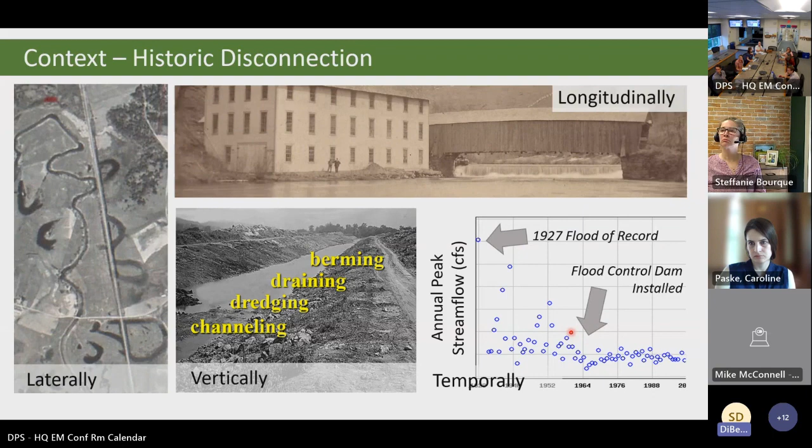So those disconnections really translate, on the left, to water quality, enhanced export as rivers get disconnected from their floodplains. Maybe what we're all more focused on today is that with stuff in the way in floodplains, we get a lot of damages. We saw a lot of this really play out in notorious ways during Irene, but this happens all over the state. You all know from ongoing flood damage, and this happens at different scales.

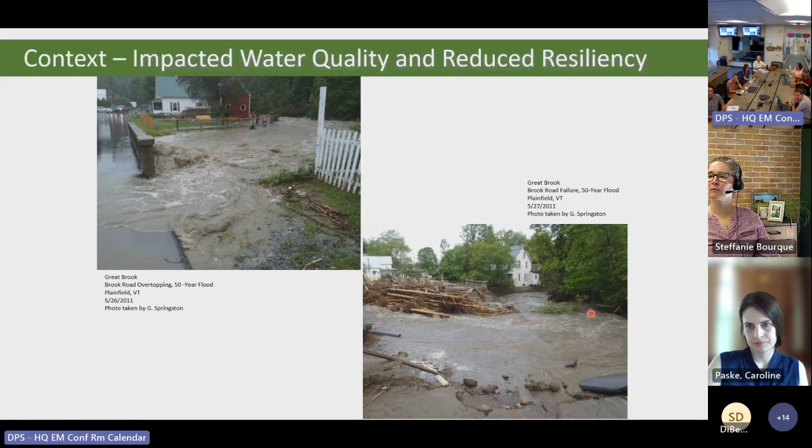We think a lot about the pictures we've seen, going back to Route 4 and Mendon Brook, major disruptions. But here's a small bridge and playing field where enough floodplain's been disconnected in a system that's in a narrow valley, causing disruptions to debris transport. So there's an ongoing project to put in a bridge that fits the stream channel but also tries to improve transport. A lot of this really stems from disconnection in the floodplains.

Another example or two: this is a project ongoing in the area of Williams Street in Brattleboro. There's going to be a big floodplain reconnection project there that will help with flood storage, again addressing developed floodplains and some historic filling in floodplains. On the right, you can see that we are forcing rivers to do things they don't often do, and this is really disrupting the longitudinal and temporal connectivity.

And this is Roaring Brook in Killington, where the brook comes out along Route 4 and is asked to make a hard river left turn into an alluvial fan. You can see that after Irene the fan was reformed, maybe in a lower area. This whole area is an alluvial fan, and it really comes back to the connectivity of these rivers, and they create hazards that play out over a range of storms.

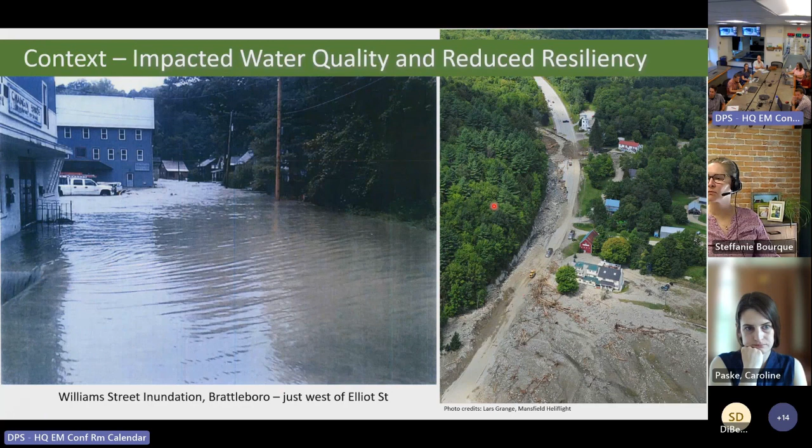So really FFI is going to try to use some of the research we're using to start understanding resiliency and what that risk reduction might look like. And that's kind of the goal of today.

Taking a step back, to understand FFI, you need to know a little bit about the TMDL. It's a very unique TMDL for Lake Champlain, and it includes a component, a sector that's linked to river instability, 20% of the pie. This is based on phosphorus loading, but nonetheless, the framework of this is really how we get to resiliency, and you'll see it as we talk today.

So phosphorus export happens from the landscape, and some monitoring and previous studies suggest that 20% of that comes from unstable river channels, and a lot of that stems from disconnection from floodplains. So it's a unique TMDL in that we will continue our policies of working towards the least erosive geomorphic condition, allowing channel evolution to play out.

And so the channel erosion practice, it says it's not a conventional site scale BMP. The idea is, and we'll talk a lot about this today, that if you harden streams in the river corridor, you're not getting a credit for those from a phosphorus perspective. And this might put a nuance in some of our work we do to keep people safe around rivers and to reduce flood hazards.

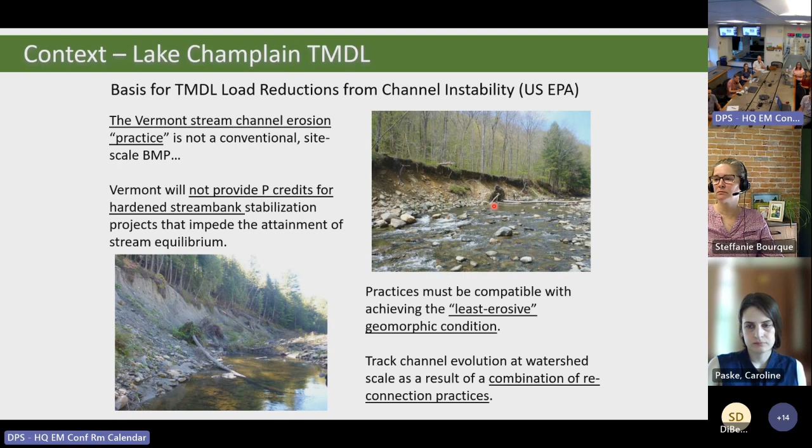If you think about what we do on the landscape in terms of floodplain reconnection projects, when we put a corridor protection, a river corridor protection easement on an area, we allow this process to play out, or we preserve a floodplain connection. When we go out and lower a floodplain, we're really pushing a channel towards stage 5 of that evolution process.

And then you'd get some crediting for that. What's more important for this group is that crediting is linked to floodplain connectivity. So Evan's going to dig deep into the departure analysis, because it's not only the basis for how we provide P credits, but it's the basis for how we offer credits or potential risk reduction in dollar amounts for resiliency.

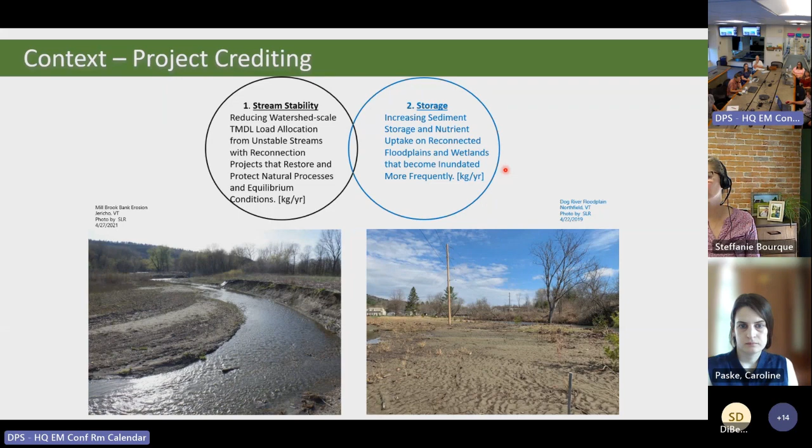From a water quality perspective, you get credit for two things: one is you do a project that improves stream stability through reconnection, and two is you create storage. You'll see a bit about this as we play around with the web application. If you want to really dig deep into this, there's a several hour training that's going to be a video, but we'll focus on resiliency here.

You can also credit post-2016, when the TMDL was implemented. That's maybe a little less relevant here, but it's important to understand the vision of that, because when we do our resiliency projects, we can actually impede on this natural vision, which would eliminate the potential for other credits going along. So when we do a water quality project, a resiliency project, or a habitat project, ideally these co-benefits go together—even around the transportation system, we can get crediting for that.

This is a graphic that I believe Stacy, Shannon, and Mike put together—it was a combined effort out of DEC.

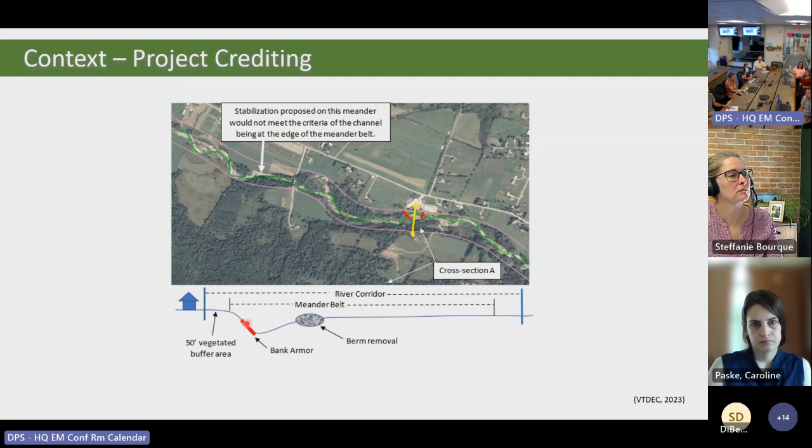Just an aside—I've been doing some project work recently around riprap and historic riprap, and we're seeing like a 10 to 20 year lifespan on armored banks before they have to be maintained, in pretty steep and high power settings, like on the New Haven River and along some roads. So there are nudges you can do to make that longer or shorter, but this riprap is a temporary thing, something we have to deal with and maintain over the long term. Just a side note.

Then there's been some discussion about the Connecticut Basin. The methods would have to be—not the floodplain connectivity methods—but on the nutrient side, methods would have to be changed because nitrogen becomes more of an issue in the Connecticut Basin. The TMDL for Long Island Sound, its receiving water, is a nitrogen TMDL. So there would probably be some change in methodologies.

And then we haven't really talked about the Hudson drainage area and down there. So right now our focus is the Champlain Basin.

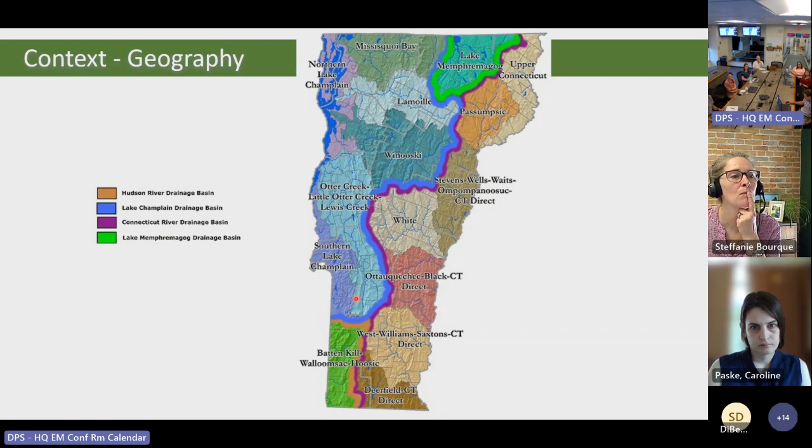State funded a project in Ripton, Vermont. Middlebury River was another big hazard mitigation project where flood chutes are reconnected. These are like safety relief valves for when flooding happens. The nice thing about these is they're out there—a lot of the work happens outside of a flowing river.

Berm removal—we did an assessment on cost effectiveness on the phosphorus side, and we found that berm removal is probably the most cost effective way to get phosphorus credits. We're not going to dig deep into that information, but if you think about a berm, it often has the most bang for your buck per dollar spent on floodplain reconnection because it's a smaller feature that runs right through a floodplain.

A piece of the context is Vermont's been, in my view, leading the way on floodplain reconnection. We had this great geomorphic data set. It moved to river corridor planning. Our state has always been looking at risk reduction. When I first learned about the rivers program, there was always a three-prong approach: habitat, public safety, and resiliency and water quality. That really led to a lot of these floodplain restoration projects.

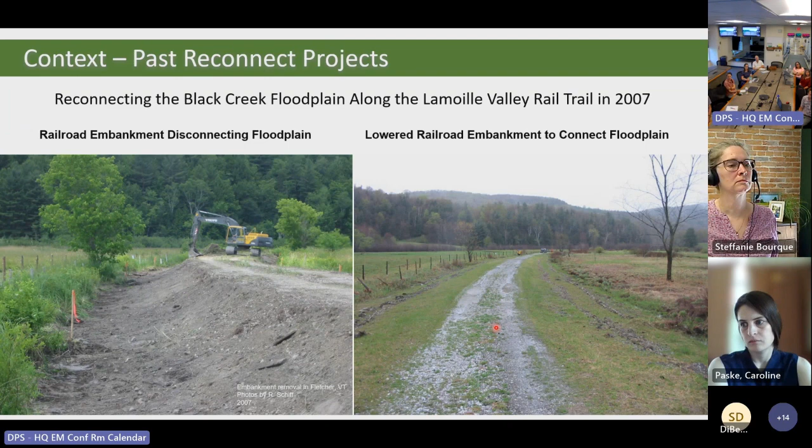So this is the Black Creek floodplain reconnection. I believe this spot was in the Fletcher, Bakersfield area, where you basically lowered a berm and reconnected a floodplain. And now the Lamoille Valley Rail Trail goes through the area.

All this information is housed on a web application. We're going to play around with it after the break. I do want to credit Stone Environmental, which actually built the physical web application. Evan, myself, Mike, Kristen Underwood, and others really worked on the methodology development, and they did a nice job smashing this all together into a web application.

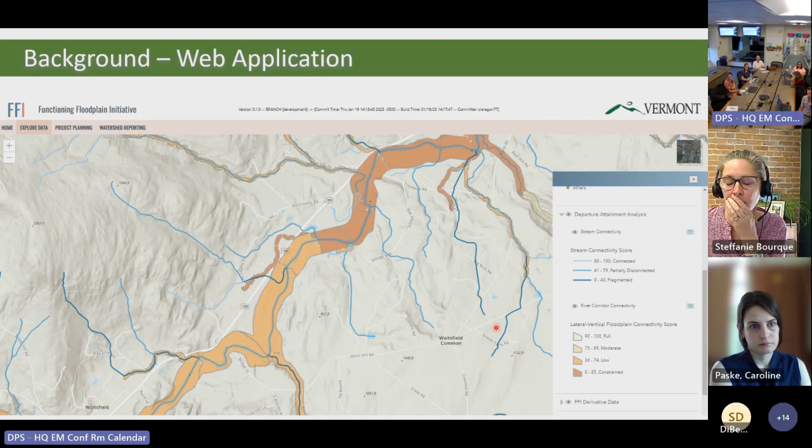And in that, you can start to look at connectivity. So Evan's going to give us a walk through that after the break.

One thing I wanted to say is that FFI, as we've started using the tool more and more and made refinements, is something you're going to revisit as a project gets developed. So you might use FFI to do some initial planning and project development, think about it during alternatives analysis, but you might keep coming back to it as you learn more about a project through the design and evaluation process.

The size of a project might shape some of the parameters, and reconnections as you develop a project just might expand. So whether you're looking for a phosphorus credit, a resiliency credit, or a habitat credit, you'll probably be coming back a few times to the tool. And once you get comfortable using it, it's really quick to just put in the information and get some predictions of what you're crediting and what your benefits might be in the project.

Everything we're going to talk about today, and probably even more, is in the user guide. We're working on a revision—we're about to wrap up this phase of the FFI. This is our last training at the end of the month, so the user guide's getting an overhaul. All the nitty-gritty details and background we're going to talk about today are in the appendices, so you can dig deep into them on all the phases of FFI.

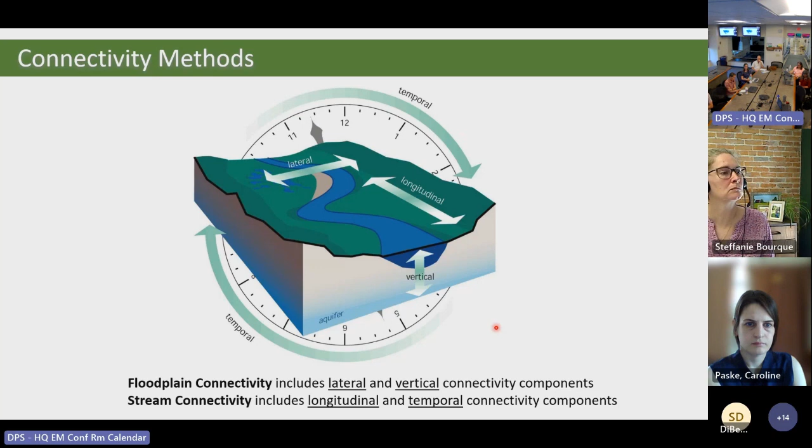When we talk about connectivity, you'll hear us talk about floodplain connectivity and stream connectivity. Floodplain connectivity encompasses lateral and vertical components, and stream connectivity longitudinal and temporal. Here's a simple graphic to illustrate our target condition for connectivity. An ideal connected river is fully connected laterally and vertically, has robust protections on the landscape, including easements or other protections I'll describe in a bit, and has a healthy woody vegetated buffer. Those are the three components.

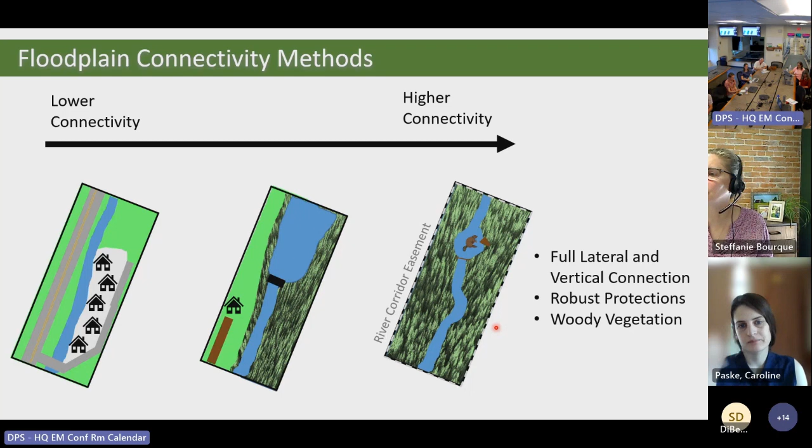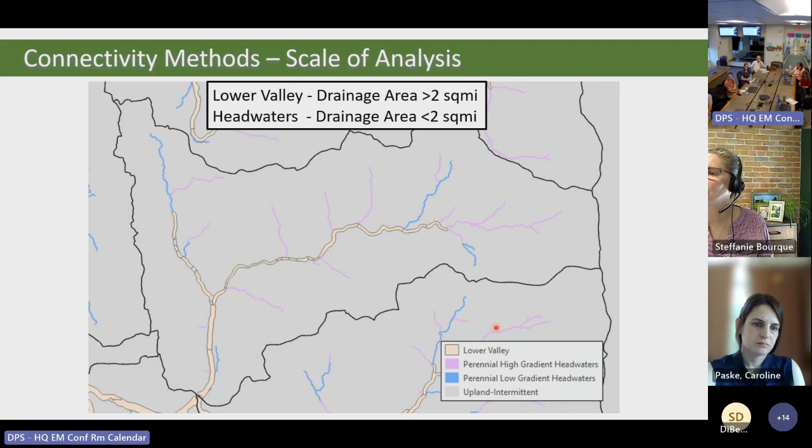We measure connectivity at different scales, and the number to keep in mind is 2. 2 square miles separates what we call the lower valley reaches from the headwaters, which may be familiar to some of you. The river corridors drawn at the statewide scale from DEC start at the 2 square mile drainage, go downstream, and the headwaters are upslope from that. The other number 2 to keep in mind is 2%, since we separate high gradient and low gradient streams based on that 2% threshold.

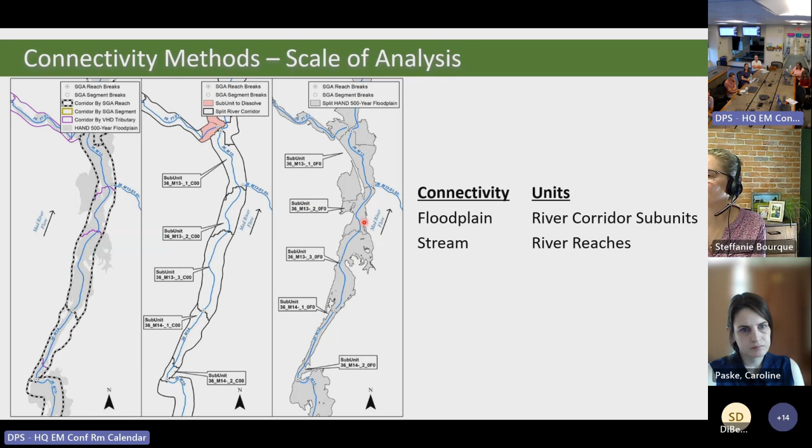Protections are an area-weighted factor of different overlays on the landscape that we get from mapping. The highest level of protection would be a river corridor easement that protects the corridor in perpetuity and allows the river to establish its full pattern and profile. Other protections, like floodplain protections and state lands, we consider a lower level. We do an overlay in GIS, consider all those different levels of protection, and translate this dimensionless rating into high, moderate, limited, or mostly absent.

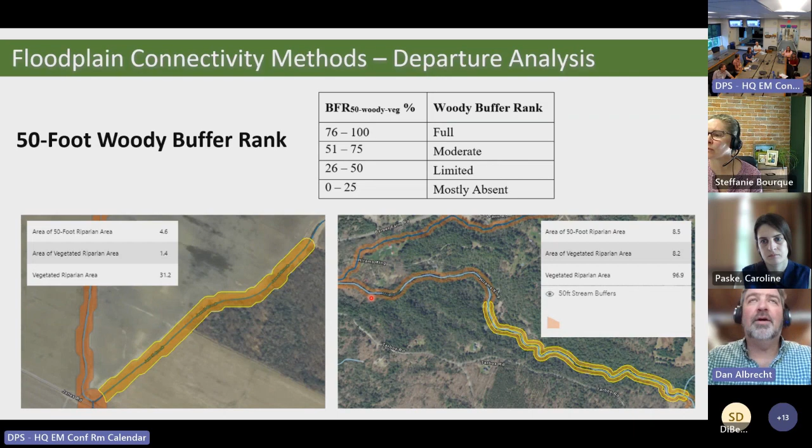I don't know if anyone else wants to add. Well, yep, that's what I was thinking it was. So you answered my question. And I think there's always the chance at some time we decide it's not, like in Brattleboro. I was surprised.

I'm glad you said something, Dan, because I was like, oh, we snuck through that FEMA floodway. God, it was in the moderate category. There was a lot of debate about some of these.

I think the thought was that if there was a potential for someone to control a river and do a disconnection project, it could be like a small berm or a little armor, and those happened all over these floodways. So unless we're sure, we're going to bump it down a little bit and create the potential for a reconnection project. I think that was our thinking.

Yeah, that's a really important point, I think. Flood hazard bylaws don't prevent armoring per se, or stream alteration permits from being issued to stop migration.

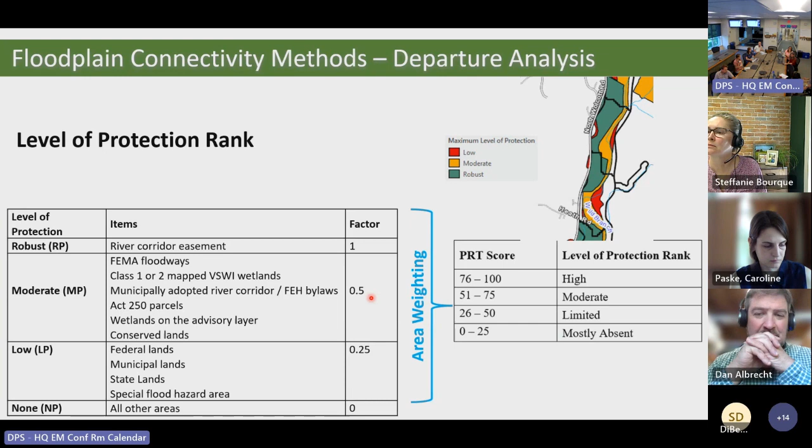I think wetlands and floodways were in a one, and a couple people brought this up and we agreed we should probably bump those down. Because a FEMA floodway is looking at something different, it's looking at conveyance of water, purely how quickly can we pass water somewhere else. It's almost the opposite.

Thanks, Dan. Okay, so then we bring, I'm just going to keep zooming along here because we got a fair amount to cover. We bring these three criteria together. You can see the weighting in the upper left: 50% for lateral meander connectivity, 35% for the protections, 15% for the buffer. That's 100%.

Now we bring in, so this is lateral connectivity, and now we bring in the vertical component. So what this map is showing, zooming out in the Mad River Valley, you see a lot of green, and that's because laterally the Mad River Valley is actually pretty free of constraints if you ignore agricultural constraints to start. But the river is very incised through the Mad River Valley.

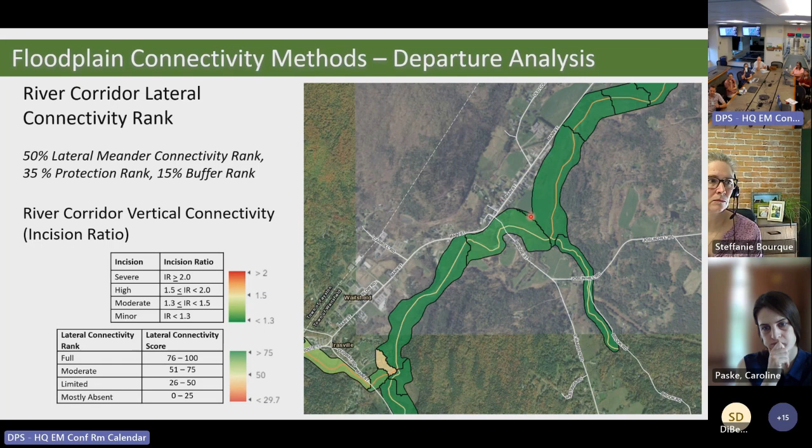So now we bring in a weighting of one-to-one, lateral connectivity and vertical connectivity, because really you need equal parts both to have a connected river. And when we consider the incision ratio, we see in the Mad River Valley in particular, and a lot of our lower valley reaches that are incised, we bring those together one-to-one and we have a pretty low connectivity rating, even if laterally we're free of constraints.

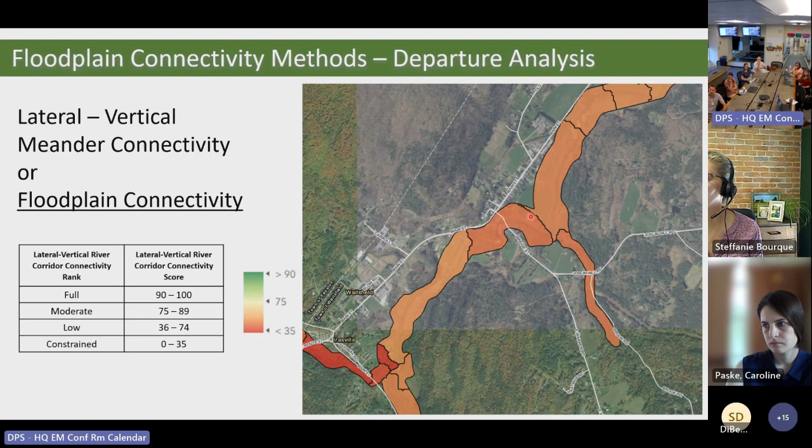So stream connectivity is made up of the longitudinal and temporal components, 60% and 40%. Here we're talking about longitudinal barriers to the movement of water, sediment, debris, and ice downstream, and aquatic organisms upstream. Temporal connectivity considers the timing and magnitude of flow, including low flows. A good example of human infrastructure that disrupts both would be a big flood control dam, which affects how water and sediment debris moves downstream and prevents AOP upstream.

So for both longitudinal and temporal, we start with a score of 100, pretty simple scoring, and then we deduct based on the magnitude of that disruption along the network. We do consider incision as well, because incised reaches will disrupt the sediment regime and the balance of sediment moving down valley.

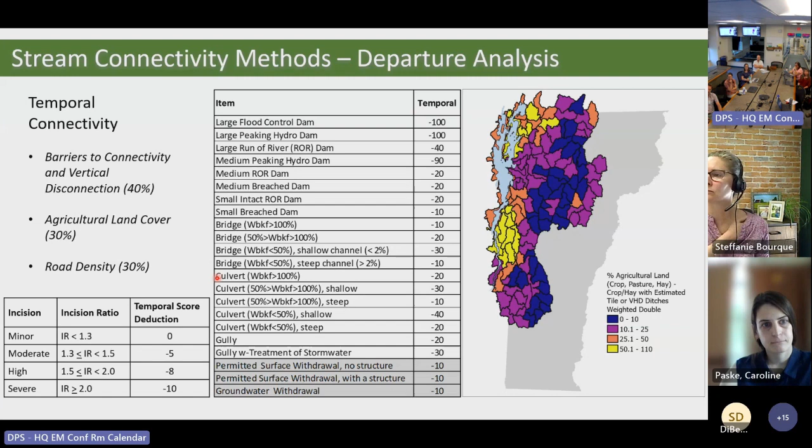And for temporal connectivity, we're considering changes on the landscape, urbanization, roads, agriculture that affect runoff patterns, and again incision, which affects the connectivity of the floodplain and storage of floodwaters in particular during a big flood. Same construct: we start with a score of 100 and deduct based on the scale of that manipulation.

So then bringing all this back to the phosphorus loading. I know we're focused on resiliency today, but if you get into this tool, invariably you're going to want to understand the phosphorus crediting. So remember Roy showed that image of the different allocations by HUC 12 for phosphorus.

I think that is it for my piece.

Maybe go back one second. The other important thing here is this departure analysis lets us know if you go to a watershed or a subunit, how connected or disconnected it is. So no matter what benefit you're interested in, habitat, resiliency, water quality, if you can say this subunit is 100% connected, this river reach is 100% connected up and downstream, then you know you're not going to have the most benefit. Whereas you can simply go to the web and say these are very disconnected, that's where I'm going to get a benefit if I do a project there. So the connectivity methods just described are really the basis for everything in FFI in that stream channel stability sector.

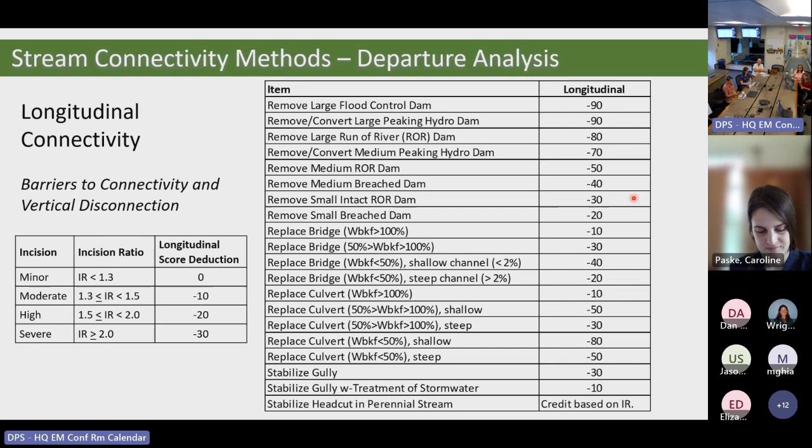Take a question, go ahead. It was just asking if the tool shows connectivity for the full state or just the Champlain Basin. Right now it's just for the Champlain Basin.

Okay, all right, good questions. So let's hop into the resiliency methods.

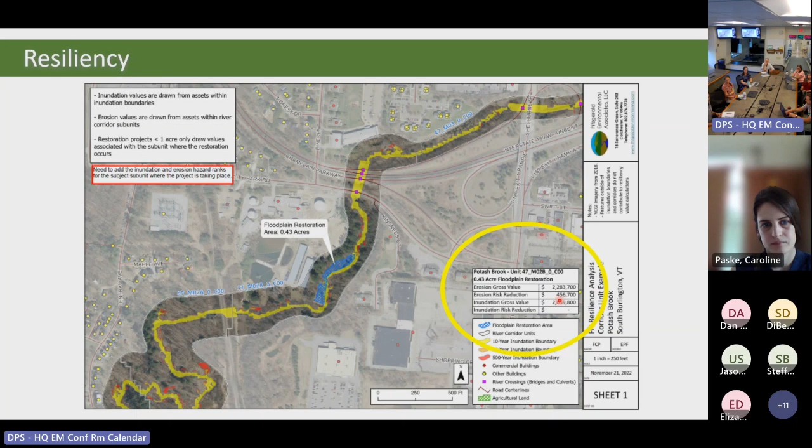Wanted to just dig deep. Mike talked about the research, and that's really been, for me, one of the coolest parts of this, beyond this team of people to work with—getting research as it's happening into something that's going to affect policy is pretty cool. I think what I'm seeing is the floodplain research, which includes a pretty cool thread of resiliency information, like Carrie Watson's work about the Middlebury River and all that. There's a whole line of research at UVM that's going to really help us.

And there's not a lot of information out there on how, when you change floodplains, what happens to the water quality, what happens to the habitat and to public safety. So we're lucky to have that going on. I think it's going to continue, and I think it will find its way into FFI, but we have the methods to start.

One of the issues was we didn't have floodplains all around the basin. So Rebecca Deal and Kristen and others created this methodology to create floodplains. You can get these on VCGI now. This is kind of a game changer for someone thinking about planning for risk, and even doing projects—we do a lot of projects in rural areas that are reconnected floodplains, and we don't really know where they are. So this is the basis of that floodplain mapping.

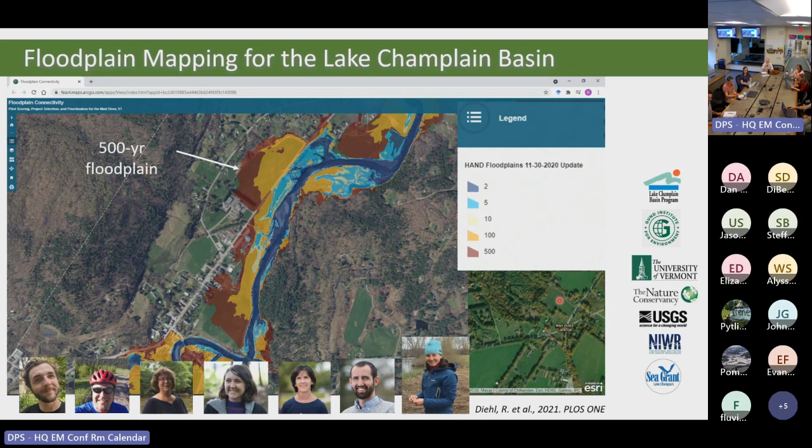So we used this estimated 500-year floodplain limit and said, every building, every house, every road—we put a value on that. Now we have that chopped up all around the Champlain Basin. It's pretty valuable for when you're thinking about a project.

Culverts and bridges vary in cost, but we went back to a whole list of projects, harvested some databases, talked with folks, and these are kind of where we landed on some of the infrastructure values. We talked to structural engineers—these things vary pretty wildly. We also looked at the cost of road reconstruction per mile, pulling on some IRENE data and current project data. Then we looked at buildings, took the E911 points, and came up with rough costs for all sorts of buildings, sewage treatment plants—pretty fun exercise. A lot of professional judgment, some empirical data and real estate data went into this.

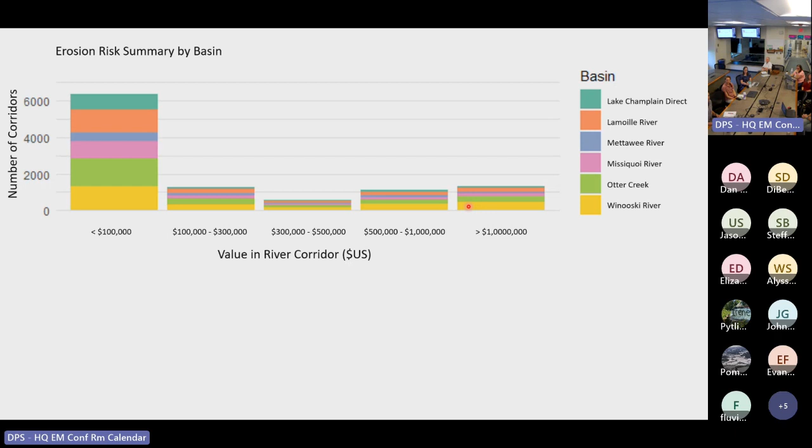You can filter all this stuff and create reports in FFI. We're probably not going to get deep into the watershed reporting, but just know, if you wanted to start tracking stuff down in the corridor in the Winooski, you can do that through FFI, or if you wanted to do it in the Mad River Basin, Mad River subwatershed, you can do that and track these values.

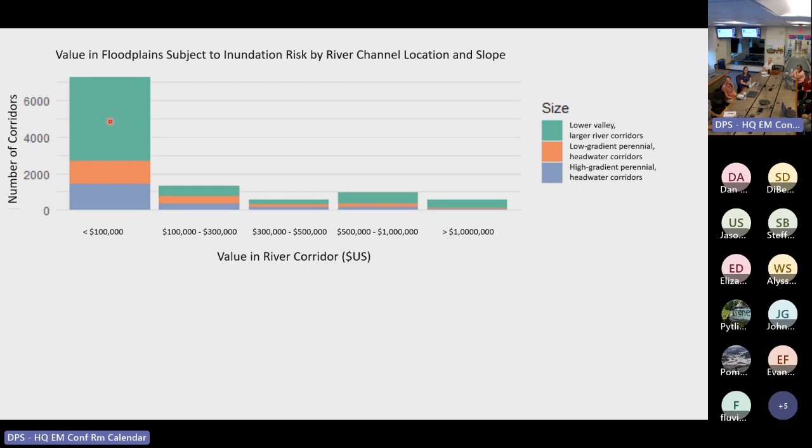This is the inundation risk. This really should say number of floodplains, because it's the broader floodplain context for inundation. Again, you see the lower valley, the lower risk here, and the higher on the right side. And again, same thing by basin. So these will be in the user guide.

We looked at some values of how do we know if you have flooding, how do we do damage reductions if we do a project that lowers the flood levels? What we found was this is out of HAZUS, which is a hazard evaluation tool for FEMA. It's kind of like a census block scale version of the BCA.

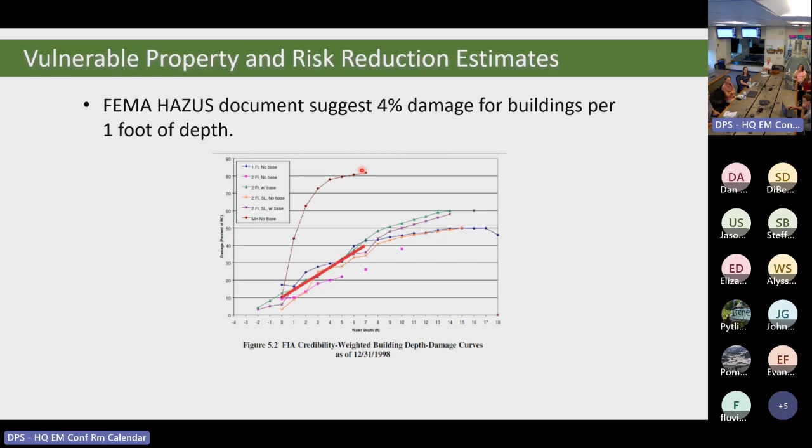You often do that at like one parcel base, and this is to do it. We've done a little work with HAZUS on census level tracts, and this plot shows that when you knock the water surface down 1 foot, you reduce your damages by about 4% of that building value. There are a couple outliers on this plot, but that's the relationship HAZUS uses in its modeling. Every foot of additional flooding in a building creates more and more damages. You cross some thresholds when you get above into a first living floor, into a second floor, and so on. But this is a general trend that we use.

There's actually some pretty big economic ramifications. This is a little bit of an aside, but talking about floodplains and value - a bunch of years back, and I think many people in this room know, FEMA realized that natural functioning floodplains really are a way to drive risk down. So now when you do BCA, you get credits for that. You get a substantial credit of nearly $37,000 per acre per year, which really has made a lot of infrastructure work viable in the state of Vermont.

I think many people know about this, but when this policy came out many years ago, it was pretty fresh. The policy was amended several years back so that there was a threshold BCR, meaning your project had to be 3/4 - the benefits had to be at least 3/4 of the cost - to be able to use this environmental benefit. Now that's not the case; you can just use those benefits. So we're using this theory and some of the damage curves to say, if I lower a flood level by doing a floodplain reconnection project by a foot, what sort of cost savings could I expect?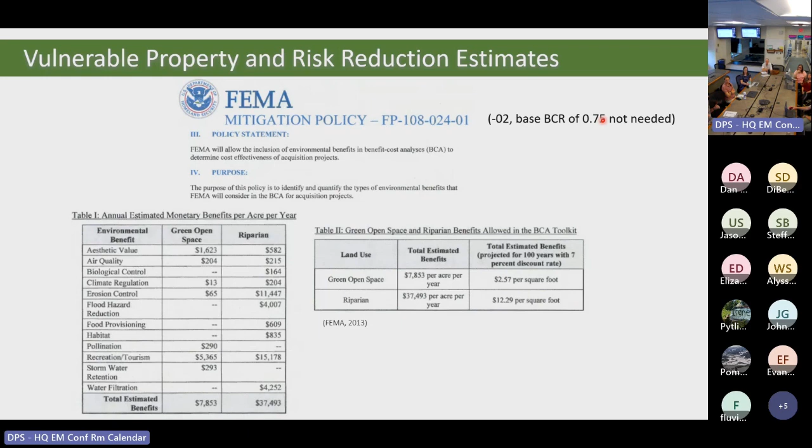We also built on this and did some evaluation in Waterbury, and this shows that for a variety of floodplain mitigation options, such as elevating or increasing the height of utilities, when you restored a 40-acre floodplain in Vermont, in Waterbury, it shows that you'd get a $10,000 benefit per year by doing a floodplain restoration project.

And that's an annualized value of knocking those benefits down when you have a big flood. This was about a 20% savings, so the hazard documentation might be a little more conservative, at about 4% savings. This is kind of the range we've seen: the economic benefits of floodplains range from about 5% to 20% of the value of your project.

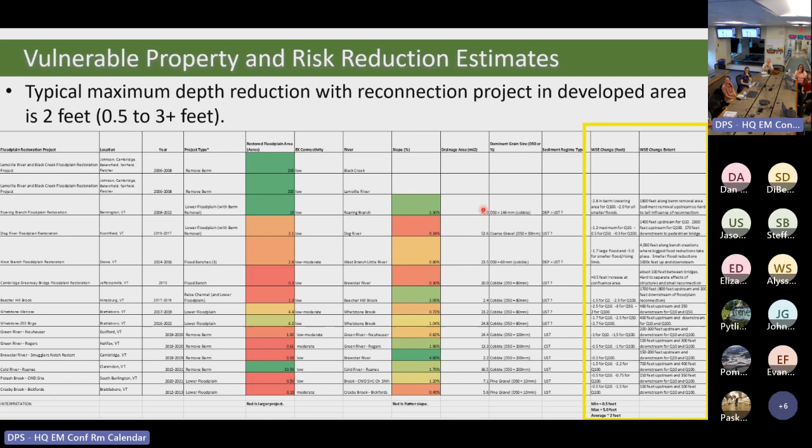We also did that on the erosion side. This is a stream power reduction. Stream power is the ability for the river channel to do work and do erosion. What we saw was a wider range, about 7 to 2,000 watts per square meter reduction.

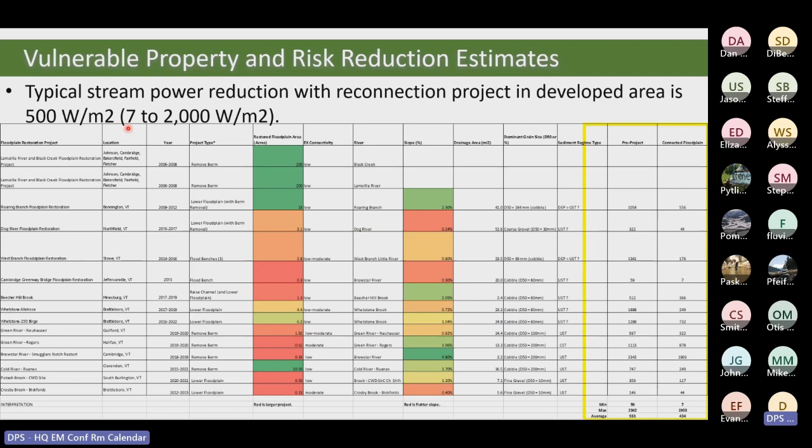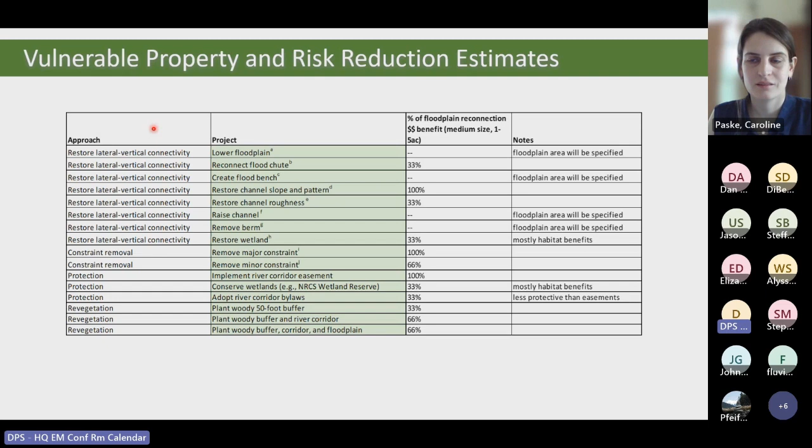Just lost audio. Looks like the room might have dropped, but the screen's still being shared. I've been losing audio, it's kind of weird, they've been dropping in and out. The light went off, it's back on now. Can you hear us now? Yes, okay, maybe I should talk a little closer to the mic. All right, we'll keep going. Just give us a quick note if you can't hear us again.

So we created a scaling system to know that some projects would get that full benefit, while others are inherently a little less productive. We used some empirical data, like if you're reconnecting a flood chute, you tend not to drop the water levels as much as if you're restoring a whole floodplain. The few models we had showed about 1/3 of that flood water reduction, so we translated that to about 1/3 of the risk reduction.

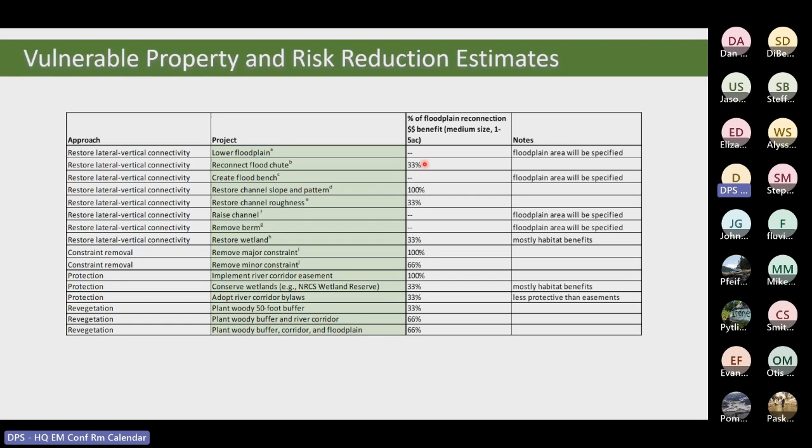Same thing with the buffers, we have a whole scaling set up for the inundation values as well. When you replace bridges, you tend to get some more benefits versus culverts. So again, we used the modeling we had and scaled those potential benefits.

At the same time, the question was asked early on: how far up and downstream do you get these benefits? So we used our modeling and looked in the literature. For smaller projects, the benefits tend to be more localized. As a project gets larger, again this is all for inundation, you tend to move up and downstream.

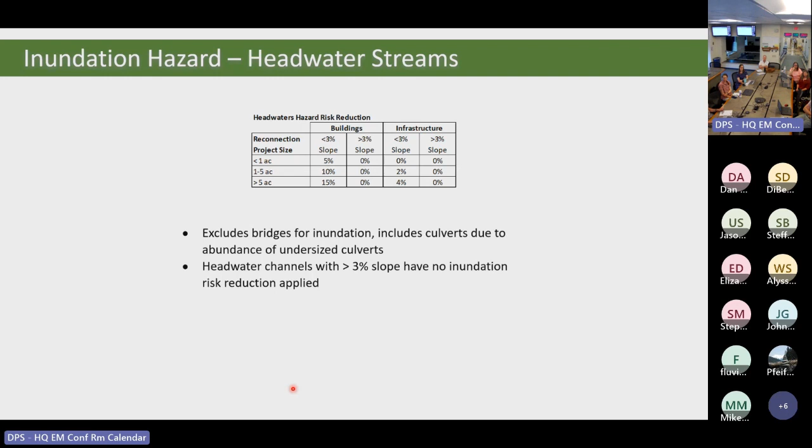But what we've done is approximate a similar method and approach, so you can do a project in the headwaters and get credit for it in any of the benefit areas you're looking at. But there's still some work to do there.

Then we have an erosion hazard screen. So that's the inundation side—water fills up, you have inundation hazards, water goes away. This is really on the power side: how do you change the erosion characteristics when you do a project?

So now we're focused on the river corridor where the river's meandering. Are you dropping down the potential for avulsions? Are you reducing bank erosion? That's really what the erosion side is.

First, we did an initial stratification by sediment regime type. This really built on some work Kristen Underwood led at UVM along with others on her team, and Mike did some work on this too. It really comes out of the River Corridor Planning Guide.

There are sediment transport streams that are inherently less dangerous and more dangerous. I'm not great on sediment transport until I see a guide, but you have certain stream types, for example, that are transport dominated and tend to be less risky. Then you have confined source and transport—streams prone to coarse sediment deposition areas—and those tend to be really prone to wild adjustments, so they're riskier.

And then you have kind of fine sediment, coarse deposition streams—these are somewhere in the middle, so you have this range. With the river corridor planning, we had this in some areas, but Kristen, as part of her research, made an algorithm using some of this data and other remote sensing data to map the whole Champlain Basin. That's our first level of classification.

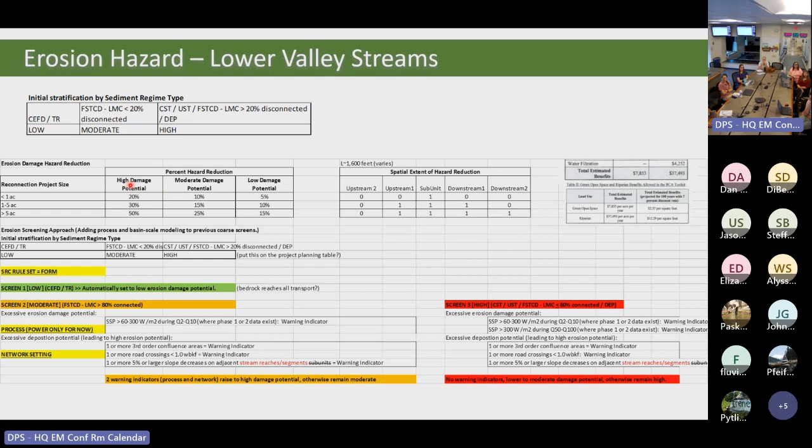So we have modeling and now we have stream power, and I'll show you that in a second. And then we have other warning indicators, like confluence areas, a lot of crossings, and big slope decreases - those are areas that tend to be really dynamic where you get a lot of damages. So we've come up with this algorithm, building on past work and UVM research, to put you in the high, moderate, or low erosion category. So if you know your project size and your category, you can get this potential benefit.

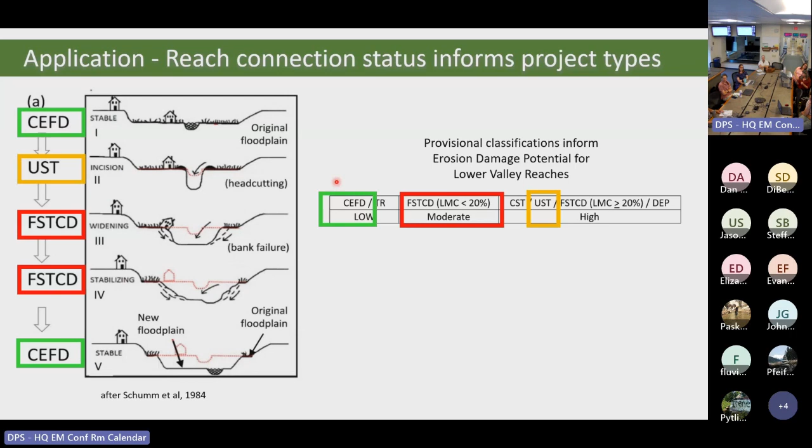I'll jump through some of this - here Kristen did some work categorizing the sediment transport regimes, which allowed us to do some initial classification of the risk. And this is a clip of the modeling that Jeremy, Matt, and some others at UVM did. We were looking at both the specific stream power in the channel and the floodplain.

When it gets up into this gray zone, we know that's an area where a lot of erosion takes place and channels tend to get really dynamic. So the question we asked on all the subunits was: when do you enter this erosion hazard zone? This is pretty sophisticated modeling that we had in spots to tune our analysis, but now we have it all over the Champlain Basin.

So we knew what storm frequency the channels entered into this erosion band, and that really helped us set up our values.

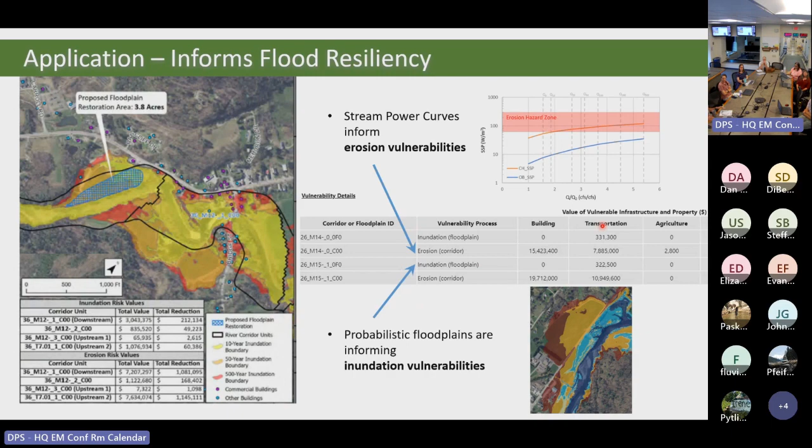And then in the end, taking a step back to that original plot, this is another example. So we take our values, insert our erosion vulnerabilities and our inundation vulnerabilities from the research, and then we have our building, transportation, and ag values, and we take a percentage off those. We also did an approximate erosion hazard and risk reduction in the headwaters.

In this case we just used the departure analysis. Evan discussed the lateral connectivity, so if there was stuff in the river corridor at a certain level, we gave it a value. This is another example - this happens to be a floodplain restoration we looked at in Johnson, and we were thinking about how much stuff's around there. Hopefully you now have a better understanding of the erosion gross value.

So there's $24 million of stuff in the corridors around this project, and there's a potential reduction based on the erosion screen of about $7 million. The inundation value is on a similar scale, but you have a lower level of risk reduction due to the inundation hazards.

So do those risk reduction values somehow represent the benefit of doing the project?

Yeah, so the scale is applied to the value. If you have a 10% value on 23 million, you'll take 10% of that and scale it down based on implementing this floodplain restoration project.

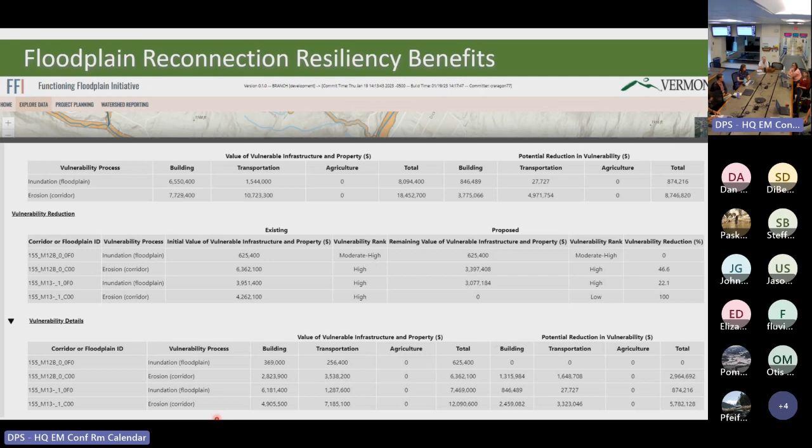We could apply under BRIC in December to develop the BCA—that should be awesome, taking this and creating that out of it. So Evan, I think BCA...

We have a little section here on projects—next 15 minutes or so to talk more about project development, which I think people are naturally going toward, which is great.

I'm going to walk through quickly how we identify the types of projects considered in the FFI, how we identify them, and how we prioritize them. There are important caveats, because there's a lot more work to be done after using the screening tool with actual projects preliminarily identified with this tool. But it's a good start based on the data we have.

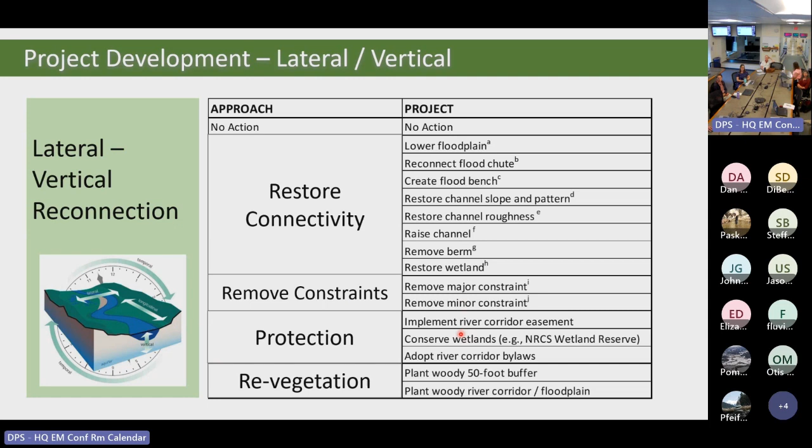When we talk about projects in the FFI, they're really aiming for improvements in connectivity, tying back to the connectivity elements I went over in the methods. For example, the 'restore connectivity' bin of project types is all about restoring vertical and lateral connectivity in a corridor or floodplain. Similarly, removing constraints means removing buildings that are in the way of a healthy river corridor, and then there are protections and revegetation.

Without going too deep into this, there was a lot of geomorphic and connectivity data we developed with this FFI, used to create algorithms by subunit to pull out potential projects based on corridor characteristics. For example, if you're considering a floodplain lowering project, you want an incised river—you're not going to reconnect a river that's already connected and not incised. So we looked at that incision ratio data.

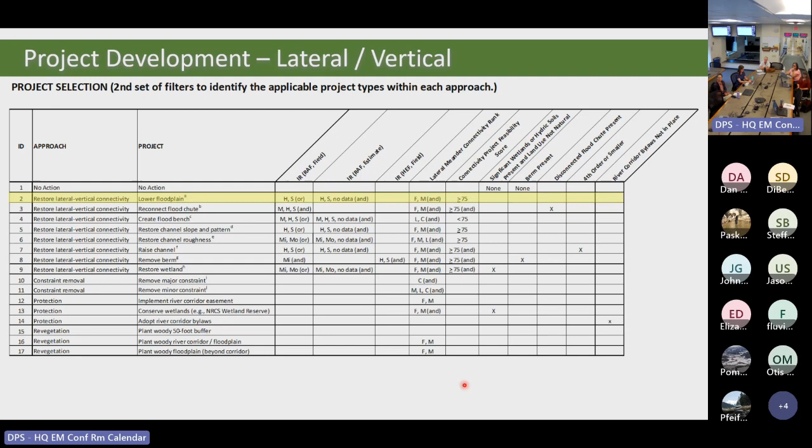Also, if you're going to do a floodplain reconnection project, you probably don't want a lot of infrastructure in the corridor unless you have the ability to remove it. So if there's a lot of infrastructure, that would dissuade you from a reconnection project. Those sorts of things were considered.

Along that same vein with floodplain lowering, we considered basic geomorphic data about stream sensitivity, and where available, data about erosion and aggradation on the reach, and level of protection in that corridor. Those things informed whether a project, if it made it through the door, was a higher or lower priority project.

So you'll see that in the FFI as high, medium, and low priority projects—again, informed not by work on the ground or talking to landowners, but by data we have at our fingertips, a remote exercise.

This information sort of goes back to Stephanie's question on priority. Based on the connectivity departure analysis explained earlier, there's a set of projects we know are out there to reconnect, and with that project you get all sorts of benefits. So that's sort of the thinking - it starts at the connectivity.

I just wanted to mention that we did a little feasibility work. I think the feasibility score includes the number of parcels in the subunit, because the more parcels you get, the more landowner interactions you have. There was also a size criteria in the initial feasibility score to start us down that path. If your project sits on one big parcel, you're probably going to have an easier time, potentially, depending on the disposition of that one owner, doing the project versus five different ones.

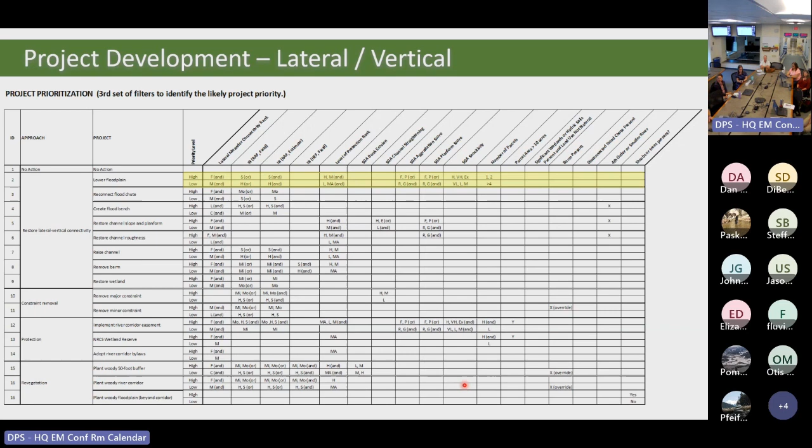Same idea with longitudinal and temporal projects - we had that little bit of confusion earlier, but it's the same table we were looking at: removing dams, replacing bridges and culverts, mitigating watershed scale alterations to hydrology, and larger sources of sediment to the river, gullies, that kind of thing.

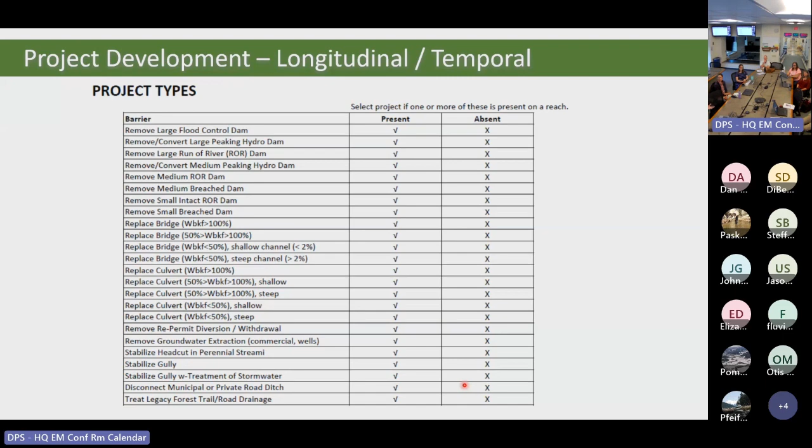These are all in the selection algorithm, which in this case is quite simple. Is it present on the stream reach? And if it is, it's a potential project. It's that simple.

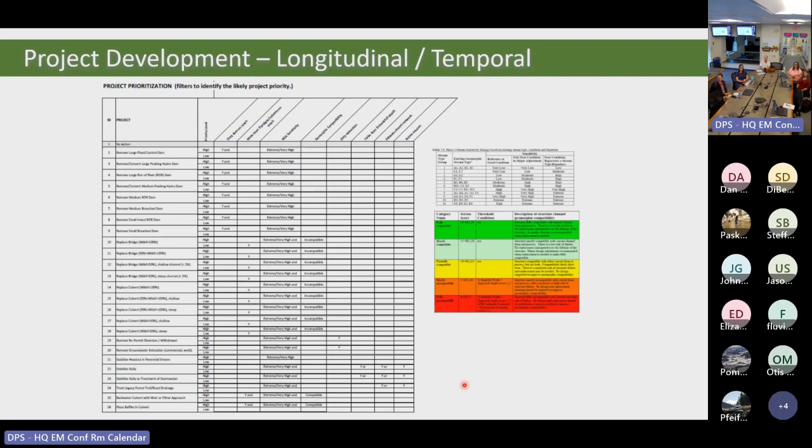And then how we prioritize these longitudinal and temporal projects - again, in the case of bridges and culverts, we have on a lot of our rivers geomorphic compatibility and aquatic organism passage data for those structures, not exhaustive for the whole Lake Champlain Basin, but pretty good coverage. So those sorts of things informed the priority of a culvert replacement - if it's really geomorphically incompatible or has no AOP, it gets a higher priority.

I kind of said this at the beginning, and you'll see this caveat and hear it throughout the day, and can see it on the FFI - I think this is probably obvious to most of you. This is a screening level tool, and it's a great starting point we think for a list of feasible projects, technically feasible based on the data that we have. But a lot more work needs to happen to move those projects forward and vet their feasibility, namely what really is on the ground, does it match the data we have, and do we have a willing partner on the ground.

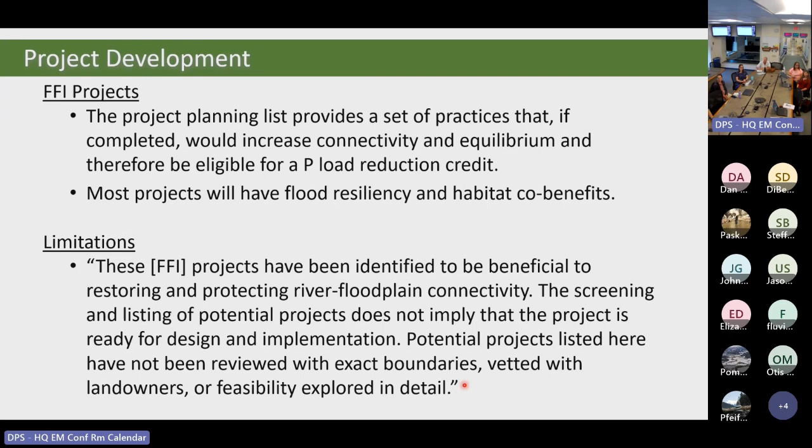This slide kind of says that same thing - outreach is needed as a next step once you have a list of projects. There's a lot of other data out there that we used in the FFI development that you can utilize at this screening level before more work happens on the ground. River corridor plans that compile a lot of geomorphic assessment data that's been collected are a great resource. If there's any alternatives analyses done in an area as part of a planning study, those would be a great resource too.

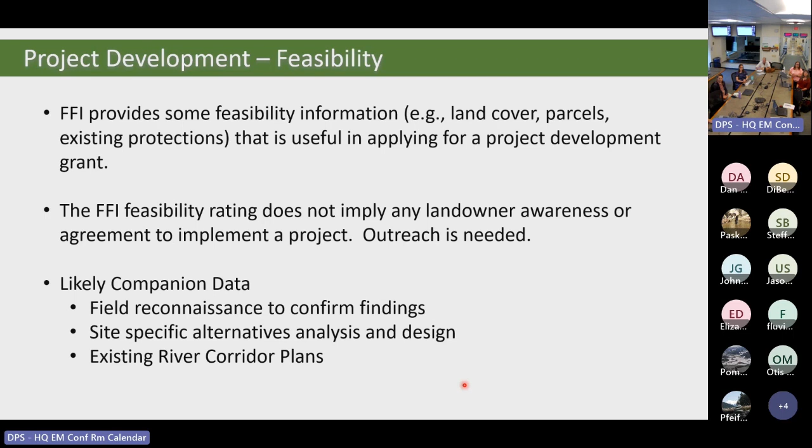But really, if that information isn't available, the next logical step would be to get down on the ground.

I think maybe that's the next slide, but for phosphorus crediting - it's pretty basic to calculate a P credit and a resiliency mitigation dollar value. You need to know what type of project, and we're going to get into this in the app, so you'll see those are already pre-populated by subunit. You need to have a sense of the size of your project.

Roy was talking about how all the benefits kind of scale based on the size of a reconnection project. For example, a floodplain project less than 1 acre is going to have quite a bit less benefit than a 5 or 6 acre project. So you at least need a ballpark idea of the area available for connectivity or reconnection, and then again the change in vertical connection - are you going from a super incised state to a fully connected state or somewhere in between?

And so the next steps after getting a credit or a resiliency benefit estimate from the tool would be landowner outreach, further data collection on the ground, landowner commitment, and all the subsequent steps we think about for design, permitting, and implementation.

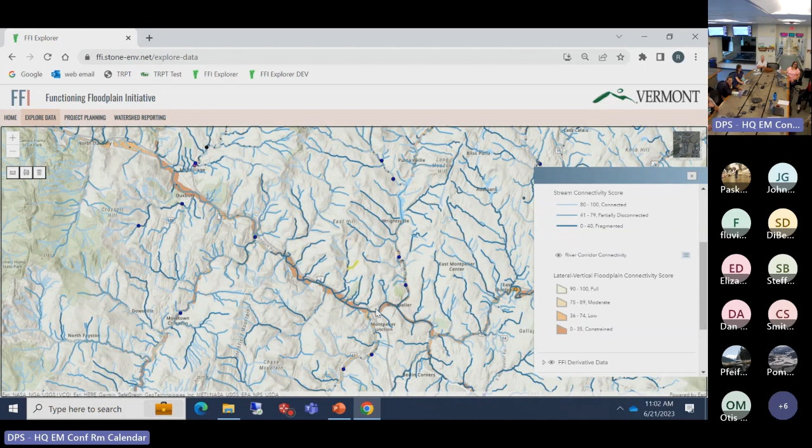So that's why when we're zoomed out at this scale it might be easier to see here, you can kind of see the patterns on the landscape. Where there's developed urban areas with a lot of residences and commercial buildings, we're going to have darker corridors in comparison to more rural areas, lighter. This gives you an indication of connectivity.

I think those are the baseline departure and connectivity scores. There's a lot of other information I'll get to, depending on time, in a minute here. I did want to just go back to our subunit here.

So we went through the connectivity details. Let's see what kind of projects were identified here. There's no berms, there is a flood chute present, we have a potential wetland restoration project. River corridor bylaws answer that question - do they exist? No. And we get some ratings here of different things that feed into the project prioritization.

We have a high incision ratio. If I go back here, I see the incision ratio is 1.7. Generally anything over 1.5 is a pretty high incision ratio. That means the bank full level is well below the top of the bank, so it's not spilling out of the floodplain that frequently.

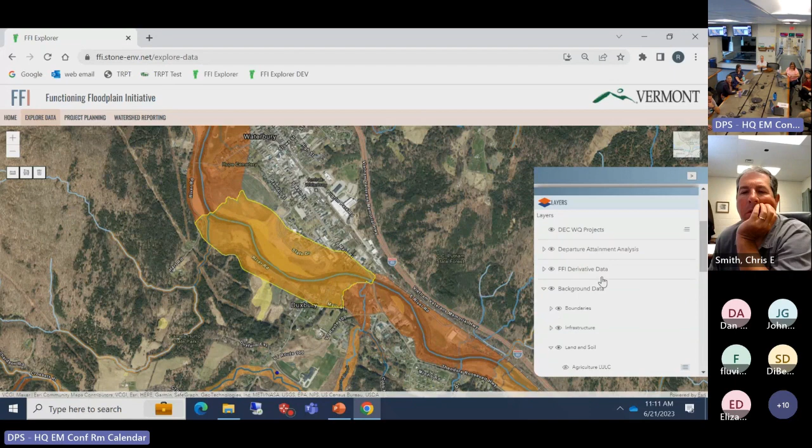So now, okay, just going to turn this off for a second so you can see. I'm kind of -- Stacy's causing me to jump ahead a little bit, which is good. Background data, you can see these little arrows here, you can get to more information here. And I just came down and clicked on the VSWI class layer.

So these are Vermont Significant Wetlands Inventory. All you have to do is click on the eyeball there and it'll pop up. So these are actually known mapped wetlands, and we'll have to check on the source for present wetland restoration potential. I can't remember off the top of my head if it's that prioritization layer Roy was referring to. There's other infrastructure here.

E911, roads, buildings, dams, and then other basic boundaries, towns, parcels, etc. And if you really wanted to dig deep into some of those underlying connectivity scores at a HUC 12 level -- this might take a minute to populate because it's a big layer -- the protections, you can click on these. I'll warn you, I just clicked on that and it's taking a while to populate because this is a kind of weighted area based on a lot of information, a protection layer that we used for the protection score and connectivity.

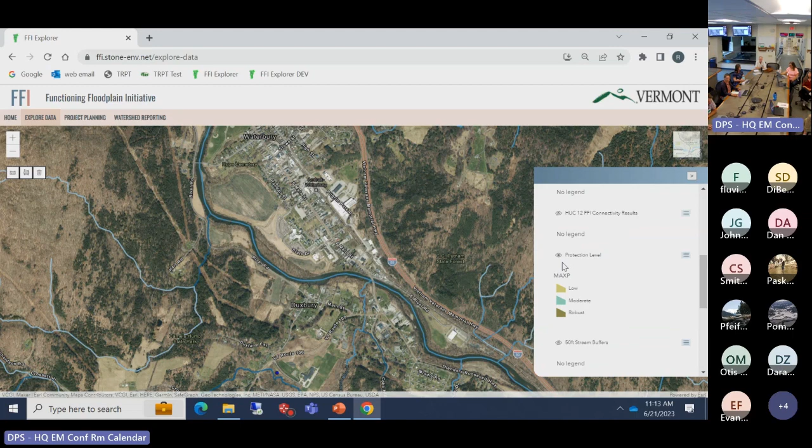Yeah, the hand floodplains are pretty interesting. It only shows up to the 500 year, right? The baseline is the 500 year. And so, again, these floodplains are delineated in sort of unison with the river corridor subunit, so we use those divisions to slice up these floodplains.

So click on one where that will align with the river corridor, if I turn that back on.

I think we just put the 500 year on here, nothing else for now. And that doesn't identify projects separately than the corridor, so if you click on the floodplain, it doesn't pull up. No, all the projects live on the stream layer or the corridor layer.

We'll do this a bit later. When you see this yellow highlight, it means you've got a reach, and there's data in there to add to the project screening. So just a little preview.

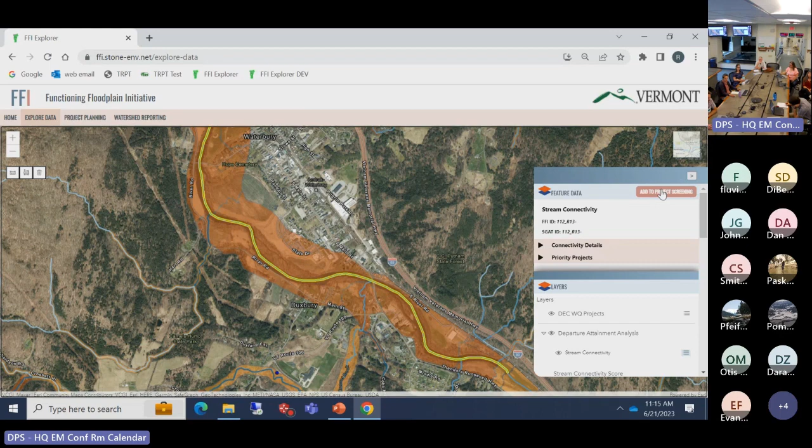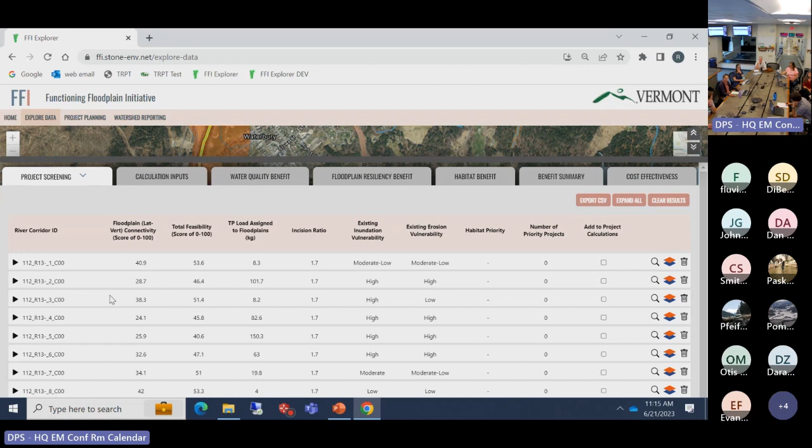Whatever projects might show up on this longer river reach, stream connectivity projects, longitudinal temporal based, I can click on this add to project screening, and now up pops - this is where we're going to go deeper in a minute - all those projects that were identified along that stream reach, and we have to do some selections to actually extract information about those projects and their benefits.

Anything else from a basic overview that you can think of? Okay, any questions about functionality?

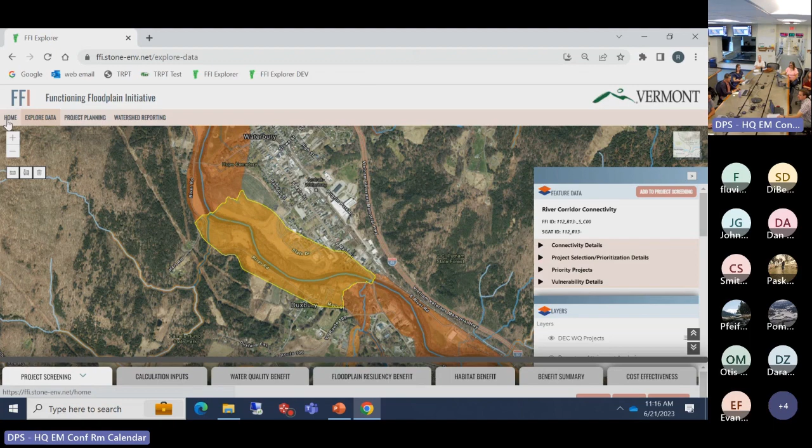Okay, so I'm actually going to click the home button, sort of start over. Maybe do that if you're following along. And Evan clicked explore map, and then the other button is begin new project planning, or you can click up here, and then select project criteria and choosing scale.

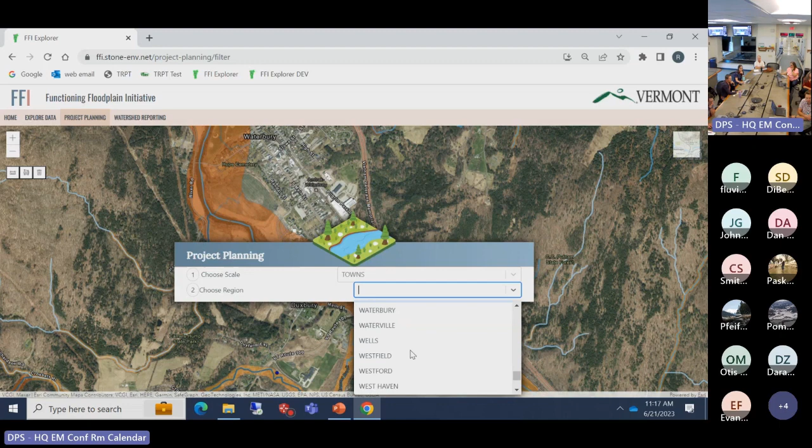Maybe we keep picking on Waterbury since we're here. You could type it in actually. We can, I just did that too. Yeah, scrolling's going. Okay.

And now select project filter criteria. This goes back to how you want to pick your projects. If you click functions, this menu comes up and you can prioritize nutrient load reduction from unstable streams, increase floodplain storage, floodplain habitat mosaics, in-stream cover mosaics. So this is the habitat piece, and then reduction of erosion-related damages and reduction of inundation-related damages here.

Can you only pick one? You can pick as many as you want. And these are dynamic, so maybe we'll pick both of these two.

And then function applicability - now this list gets filtered based on what you select above. So if there's only high, medium, or low, you only see one option there. I'm just going to click high.

The other way you can pick, if you want to search out a project that FFI has screened for, like all the floodplain restoration projects in the Winooski or the Mad River or Thatcher Brook or whatever, you can do that here. So you can pick any kind of project, and then you pick your project priority.

So if I want to know, like, what are the best buffer plantings in the area - again, I've had mixed results with the filtering. It's based on what data are here in this database, and it's a GIS tool. So sometimes it says there's no buffer plantings, and you're like, there are buffer plantings out there, we kind of know that. But the GIS data says it's all naturally vegetated for some reason, and it might either be below the resolution or the land cover changed, and FFI didn't know that. So just be aware as you filter.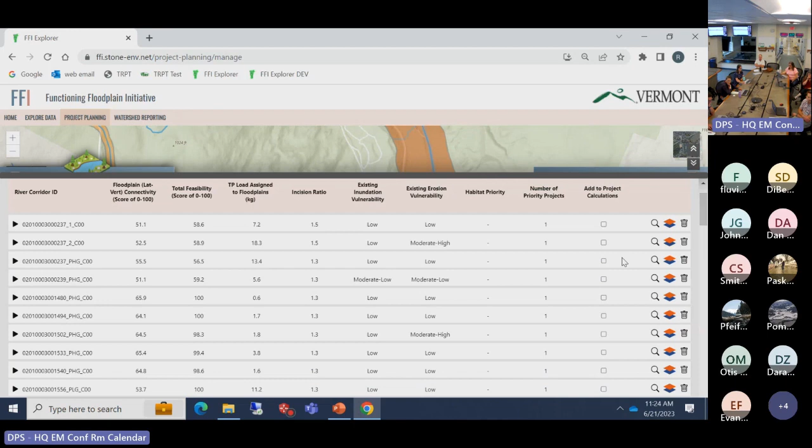Now, if I wanted to consider some more information, I would click on this box here, which goes to the top so you see it, add to project calculations. It's a little hard to move around with this giant list.

What you see is when you click on that box, the calculation inputs tab turns yellow, because it's now waiting for information from you in that piece. So you click on calculation inputs, and what you see is the floodplain, the lateral vertical, and storage crediting tab comes up. And here are the proposed projects.

These are projects that were selected through that algorithm behind FFI, and the high priority projects are checked. You may or may not be doing these projects. We could say that we're just solely lowering the floodplain. For phosphorus crediting, it doesn't really matter what you click, except for it puts it on a list on the next page, which I'll show you. But for resiliency crediting, it matters because you have to know what kind of project it is to know what sort of benefits you might get. Everything is really area based. Remember, we have to put it in an area category for the resiliency calculation.

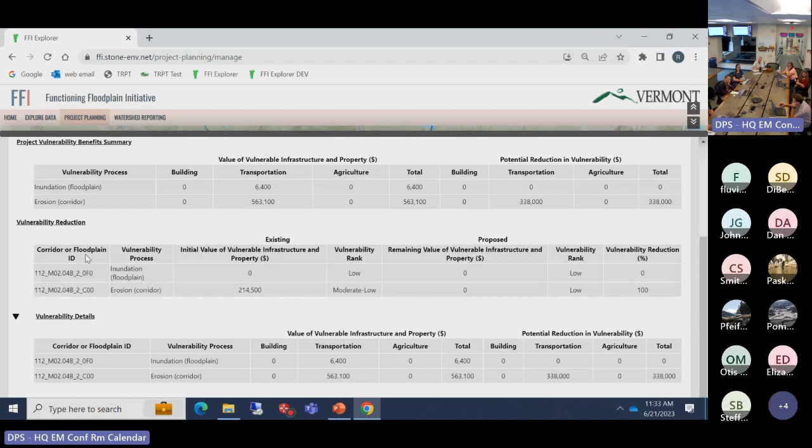So that's the planning table in a nutshell. I think I'll pause there.

How does that relate? There's the total value of 563,000 subject to potentially being eroded. That's right, in the river corridor. Okay, and you could potentially reduce that to being only 338,000?

Is that what that potential reduction means? I think that's the value, it could be reduced. Yeah, okay, the value could be reduced. And so we're getting two-thirds of that by doing what we're doing. Yeah, that's right.

So there will only be $200 and something thousand left of... yeah, and remember this...

You picked a 5-acre project, so it's actually extending a couple subunits downstream and maybe one upstream because it's a big project. So the value reduction reflects the effect not just in the subunit where the project's happening, but a couple down. In the case of erosion, I believe it's a couple downstream, maybe one upstream. In the case of inundation, where we're talking about flood water surface elevations being lowered, not just movement of materials or erosion, that extends a bit more upstream as well.

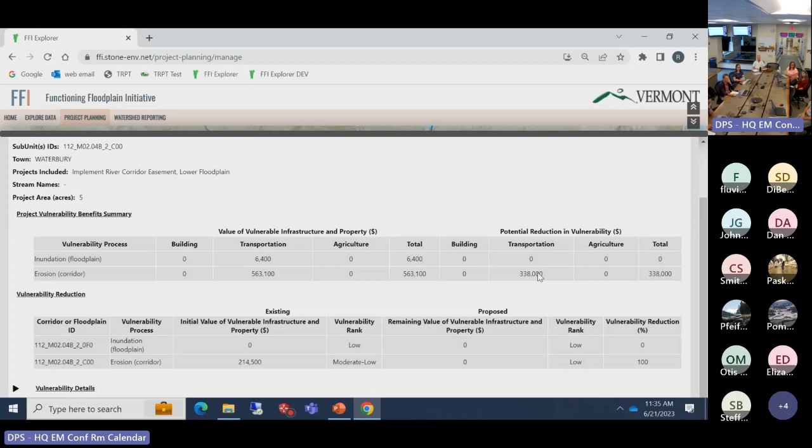So the reduction is the percentage. Yeah, I think that's right.

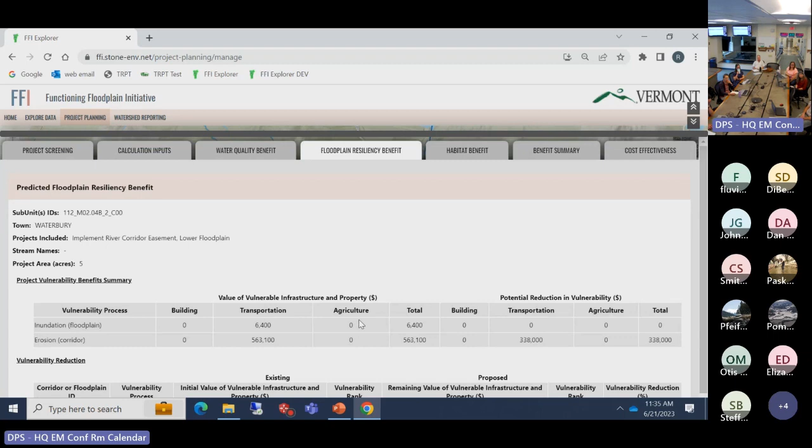Any other questions?

So we've got about 20 minutes. We have a couple case studies of projects. We thought we would look at some of the values and just keep working on the app again, and follow the leader format. So let me just hop over to the slides.

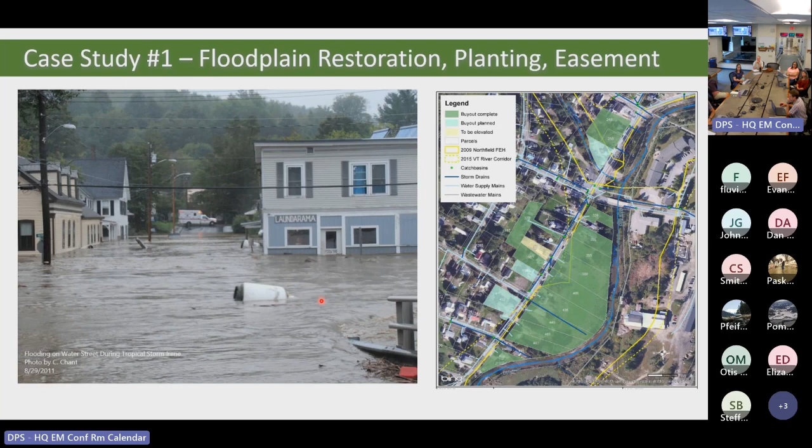Did that answer your question, Stephanie? It does, and I find myself coming to this webinar really just to help towns develop local hazard mitigation plans. And I'm looking at this tool and having a hard time figuring out how, in what circumstances, it would be appropriate for projects identified in this tool to be led by the town.

So just for what it's worth, it might be like a two-part type of project, similar to the Dog River site, where you might have buyouts that a town is looking to support that could evolve, or it's like a multiple partner type of project. Stephanie, are you asking if the town would use the tool, or more how the town might use the information from the tool?

I don't think... this is complex. I can't envision somebody — I'm working with the town of Castleton right now, so I'm trying to follow along with this tool in Castleton. I can't picture somebody from the town of Castleton using this tool.

I think the level of complexity here is pretty sophisticated. So I'm just trying to figure out how I could use this to help a community identify projects in that category of natural systems protection mitigation actions. I'm struggling to get my head around how a town might be a lead on some of these problem areas when they're not really projects on town property or within town rights of way or things of that nature.

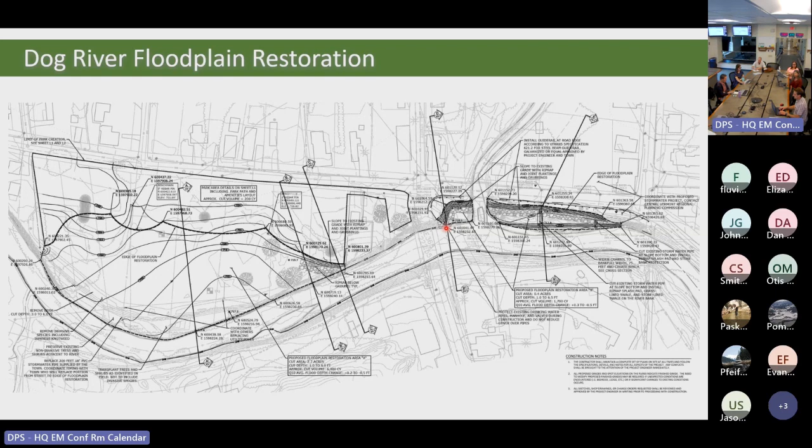The way I've pictured this tool being used with communities would be a person like yourself, or a watershed group or other folks doing planning, say for a hazard mitigation plan, looking at what areas in town may be opportunities for floodplains, or areas zoned for development that may have flood risks. How might the community look at resources to help reduce flood risks? The tool may help identify what those areas could offer for benefits and cost considerations or types of projects.

That information could be brought to the town as part of their planning process to facilitate a discussion like: this was zoned for development, but it's also a great floodplain opportunity—how might that look if we protect it versus develop it? Or, this area has been identified in a hazard mitigation plan as a potential project, and here's additional information that helps identify co-benefits that could be looked at in, say, your FEMA application considerations. That's how I've been picturing it used.

From the community aspect, there will be some projects the town may lead because they're helping sponsor the grant, say a FEMA buyout. But other projects may come to the town through watershed groups and other folks who bring it to the community and take the lead, while the town helps support the project because they see additional benefits they can receive from it. That's how I've been picturing it, but others can certainly chime in.

Mike: Stacy, you answered that pretty much like I would have—great response. In this particular case, the town was pursuing the buyouts, and the other partners Roy mentioned would probably be more comfortable with this tool and could come to Northfield's aid to say, by the way, this buyout could result in the following water quality benefits and flood resiliency benefits as calculated through the FFI, which could then help Northfield with fundraising to make the project happen.

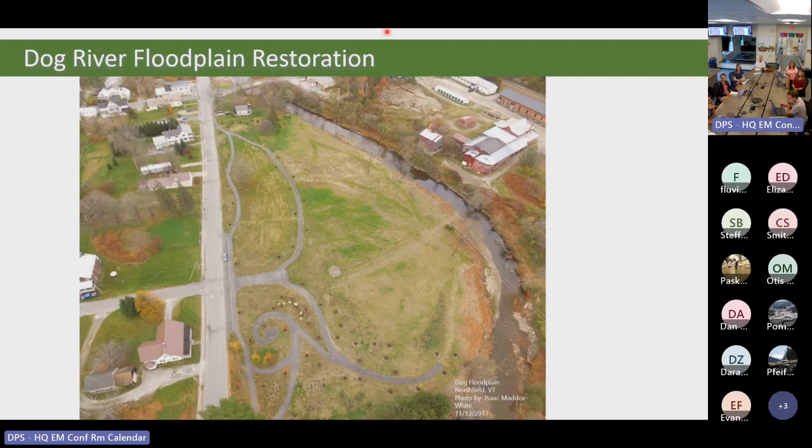So here's the Dog River Park, and the town's focus was mostly on this park creation, as well as the buyouts. Friends of the Winooski and others, and myself, designed the floodplain restoration aspect of it and the trails and such. Some folks are using the area, and here's a couple photos from the last few years. The floodplain's been active, with some sedimentation and inundation.

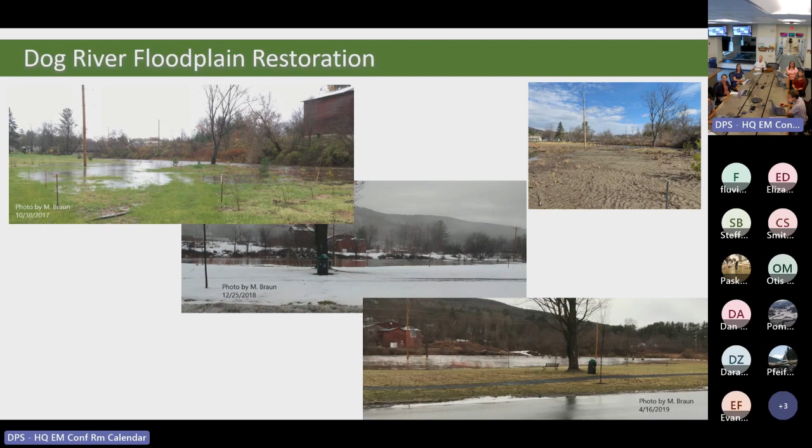And here, I'm going to jump into the FFI tool. Okay, I'm going to just go in and explore Water Street. Okay, and I'm going to do this real quick.

I will say the tool feels really complex when you start, but the more you play around with it, it's actually quite simple to do. We kind of played around with the data inputs and kept forcing ourselves—it's just area. One other thing we didn't really show you was there's an area tool, if you just wanted an area that you're looking at to consider, and then you could plug it in to really understand what kind of area and what project you're working on.

I know this project happened on both sides of Union Brook. You can see the disconnection, so I'm just going to quickly add those to the screening table.

All right, so you're going to see the speed version of this. We removed a berm, also planted the 50-foot buffer, and lowered the floodplain.

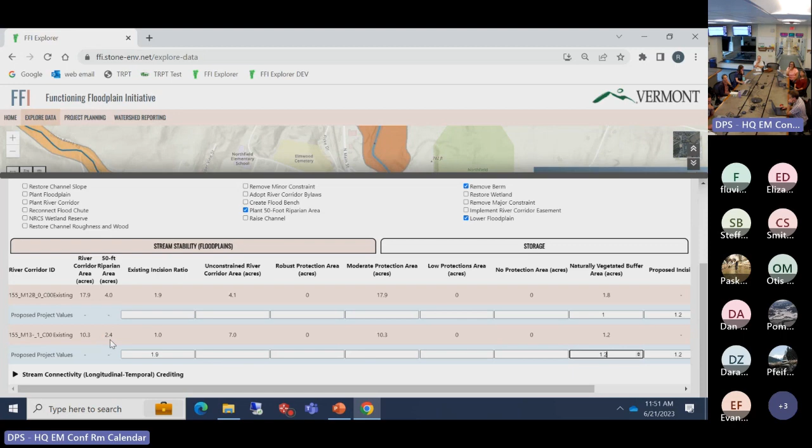Yep. And notice here, 2.4 acres, but part of it is already just added, the rest, the remainder that we vegetated. And then hit calculate. Let's look at the water quality benefit real quick, 4.2 per year.

And then we'll focus on the resiliency piece. Again, so you see the corridors now, there's 2 corridors listed, the town, remove berm, plant 50-foot buffer, lower the floodplain. Project area was total 3 acres.

And then, so there's a lot of infrastructure in this area, many millions of dollars, no ag, but you can see the transportation. There's bridges and culverts in these stretches. And pretty substantial potential reductions based on a couple feet up and downstream, and then the 4% reduction per foot and the project size.

Then you can kind of see a summary. Now, one thing you'll notice is that you're still, and this is a true reflection of the site, based on our resiliency categories of risk, you're really not dropping them down just because there's still a lot of infrastructure that's flood prone in this area. And this was something we made a point to talk about through the whole design and implementation process. Like, yeah, you're going to change the local flood dynamics and you're going to see some sedimentation.

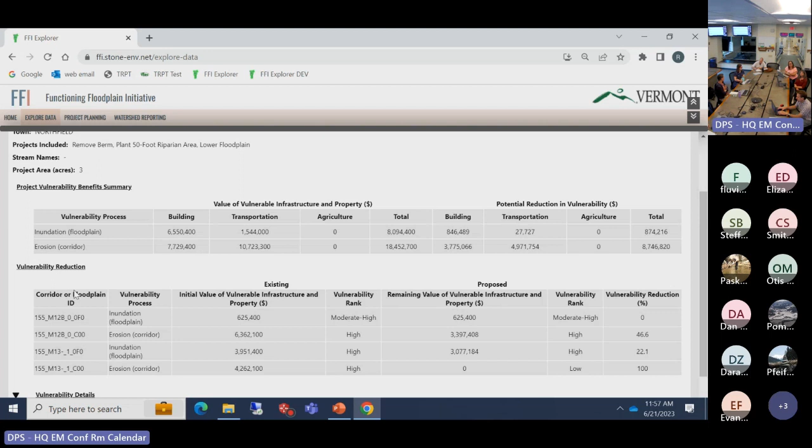That'd be great. Not to get too stuck on this hypothetical, but let's just say that the land cover dataset had still included those homes. When you do constraint removal, I'm assuming that you're having to bring the total value of structures removed to input it. So you're not able to select the houses and pull from like... Yeah, no, that's a little more detailed. So what you would do is hit constraint removal.

I don't know what the right approach would be. I think you would just hit that constraint removal and provide the data of the value.

That almost feels like we're going backwards, right? We've done the design, the project's implemented, now we're going back to this. You do this first, right? Then you say, okay, there's 12 houses getting removed, their values are this, and you'd probably be refining this initial estimate.

As you did a buyout, because what this is going to do is you hit constraint removal, and you give it an area, and it's all about those typical average values for home. It could even get the building type wrong, because that aggregate value could be off.

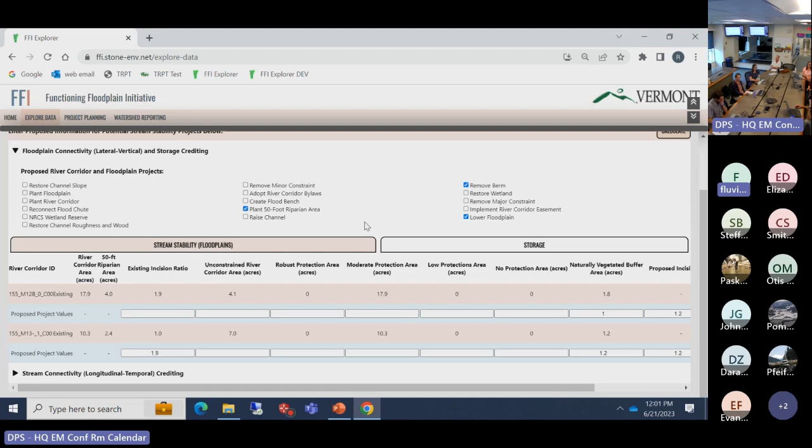I was just going to add to what Roy said, I remember doing a lot of lobbying for this project to use water quality money. And if someone had brought to me the pounds or kilograms per year that would be gained, it would have made my life a lot easier in convincing folks to spend millions of dollars of water quality money on this project.

Yeah, thanks, Mike. The different benefits and opportunities for funding that can be looked at is great. Any last questions for Roy or Evan?